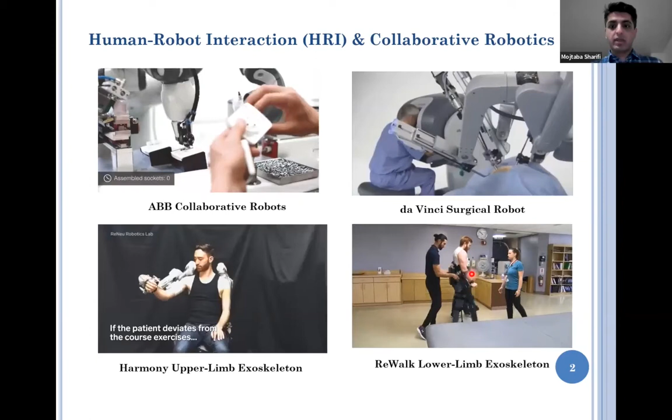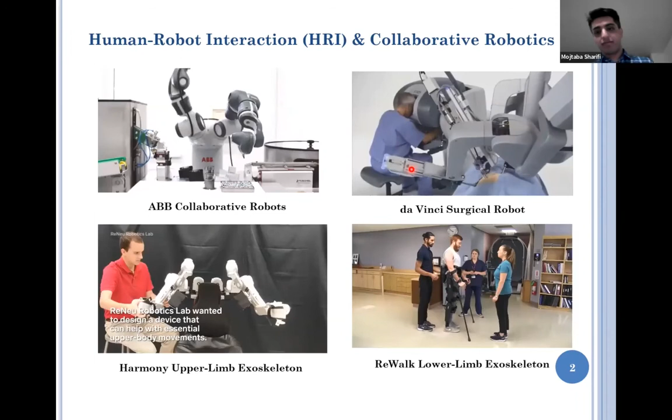Basically, in these systems, the human is the recipient of the physical assistance provided by the robot, or he or she is doing a collaborative task together with the robot. So we want to enhance the quality of life for the human, and we want to make those physical tasks simpler or easier using these autonomous systems.

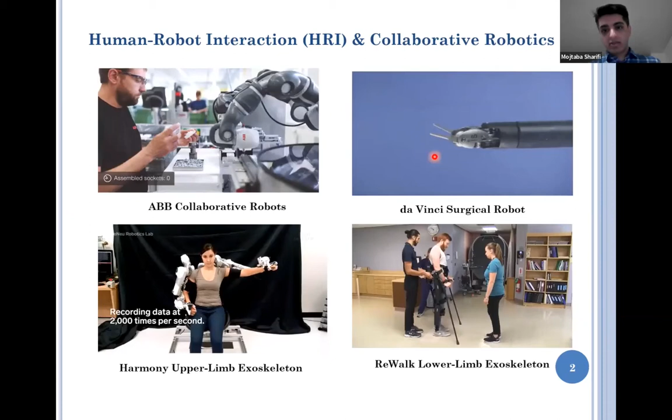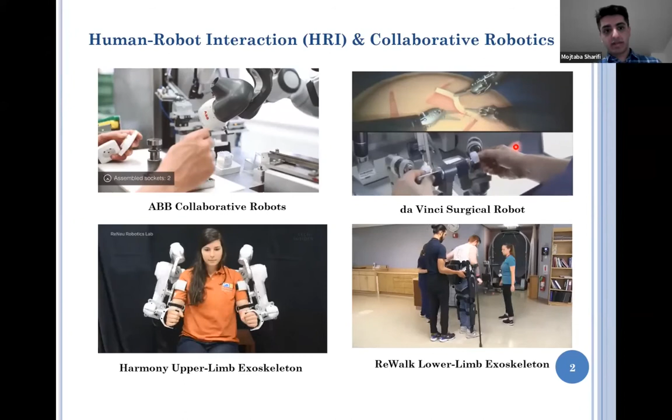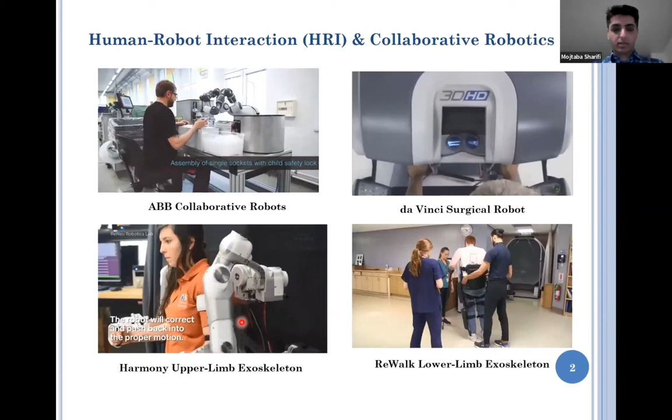So in these videos, you can see an operator that is doing a collaborative task with an industrial robot. And you can see this surgical robot that is doing a suturing task based on the motion of the surgeon's hand. And you can see upper limb and lower limb exoskeletons here. So that's the upper limb robot by Harmony Laboratory, a company in the US, and this is the robotic lower limb exoskeletons.

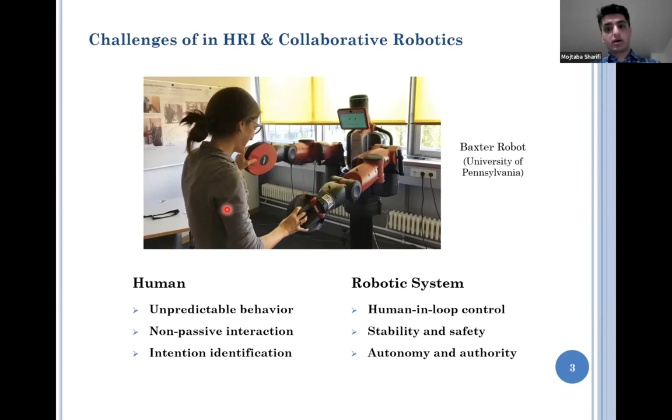At the same time, the existence of human in these HRI systems, human-robot interaction systems, can raise some concerns due to the unpredictable behavior of the human, having non-passive interaction between the robot and human, and also the requirement of identifying the intention of the human operator. So for the control of these robotic systems, we need to consider the human in the loop of the controller. This brings some technical challenges regarding robot stability and human safety, and also the shared autonomy or authority between the robot and human.

So in my research over the past 11 years, I have made an effort to resolve these challenges, and I had a general goal to balance major HRI concerns. The first concern is the human authority and the robot autonomy. The second concern, or characterization - we can look at it from different points of view - but the second one is the system stability and human safety. And the third one is the task performance. So I try to offer trade-offs between these three concerns from different points of view.

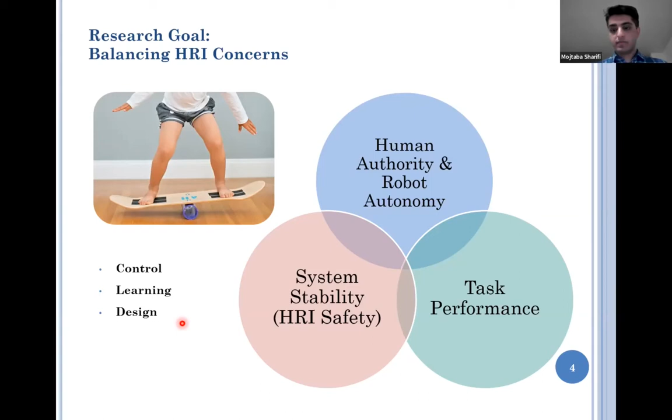In the field of control, learning, and design - most of my research was on control. Recently I moved to learning, and I have some projects on the design of these robotic systems. So in this presentation, I will just talk about my second research area, which is on interaction learning and autonomy for assistive exoskeletons, that I started from the end of my PhD and also in my postdoc.

As you may know, exoskeletons are being used in two applications. The first one is for empowerment of able-bodied people and workers in their hazardous or heavy manual tasks, so basically we want to prevent their injuries. The second application of these exoskeletons would be for assistance and rehabilitation of individuals with disabilities, basically after having an injury or having a disability.

However, doing research in this area is challenging due to having a continuum of interaction between human and robots, and the lack of measurement for interaction forces or torques compared to other HRI systems where we have one or two points of interaction. So instead of that, we have a continuum of interaction, and that makes it hard to measure the interaction forces. So now the question is, what are the basic requirements for controlling these systems?

Well, the first one would be estimating the user effort and identifying their interaction, which is hard, as I said, to measure. After that, the second challenge would be path planning for these exoskeletons, how we can do motion planning and make it personalized for each user.

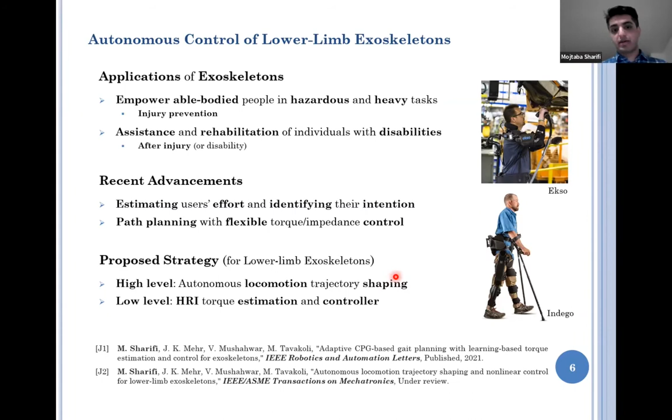So to design the control strategy, we can formulate the nonlinear dynamics of the human exoskeleton system in this form. The first term represents the inertia. The second term represents the Coriolis, centrifugal, and damping elements of the robot dynamics—I would say robot and human both together. And the third term is the gravity vector. On the right side, we have torque of the actuators of the exoskeleton, and also the torque of the human wearer, like the torque that the human can generate by activating his muscles, by contracting muscles.

So we have these dynamics, and this dynamic has some properties, such as having a positive definite inertia matrix, which has a lower bound and an upper bound. Also, it has linear parametrization characteristics, such that we can basically put all of the variables on the left side in a matrix and all of the parameters in a vector. So we call it linear parametrization.

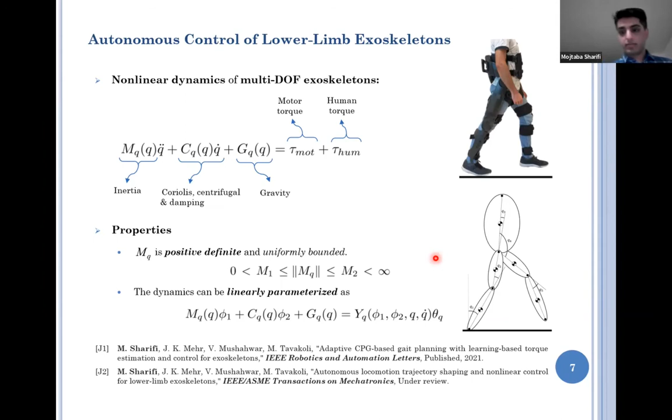So in our strategy, we have two components to generate the personalized gait trajectories to be tracked by a position controller. The first component is central pattern generator, which we call CPG, and we made that CPG adaptable to human-robot interaction, as I said.

But generally, CPGs are a set of connected networks that can produce coordinated or synchronized patterns for rhythmic activity such as walking. So they are good mathematical tools to generate those synchronized and rhythmic motions for different joints of the human body during walking. The second component in our control strategy is an adaptive disturbance observer for online estimation of the human-robot interaction torque.

So, Mojtaba, may I ask a question? Go ahead. You write on the first point that it's based on non-oscillatory inputs. What is the relevance of this? And also for walking, wouldn't most of it be considered oscillatory, or what is the motivation?

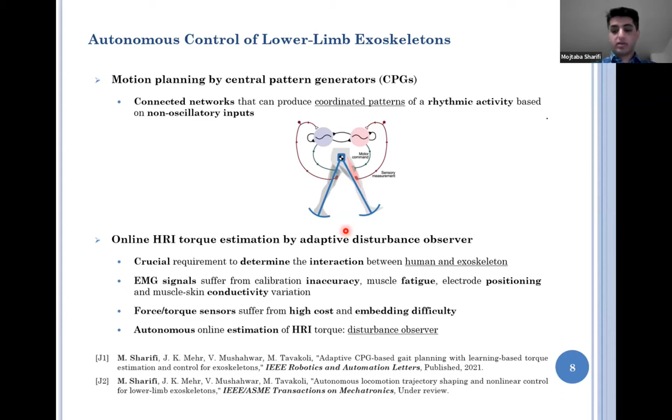So here we can see a schematic diagram of this two-level control strategy. We have some Fourier series to mathematically formulate the primary experimental data and generate a time continuous trajectory as the initial trajectory of motion. This trajectory is reshaped or updated by the adaptive CPGs in terms of the estimated human torque. And the output of this CPG will be tracked by this nonlinear controller and implemented on the exoskeleton.

So at the same time, as I said, we have an adaptive disturbance observer that has feedback from the exoskeleton that can estimate the human interaction torque. And based on that, we can estimate the human energy, like the energy that is transferred between the exoskeleton and the human. And basically this energy would change the generated trajectory by the CPG.

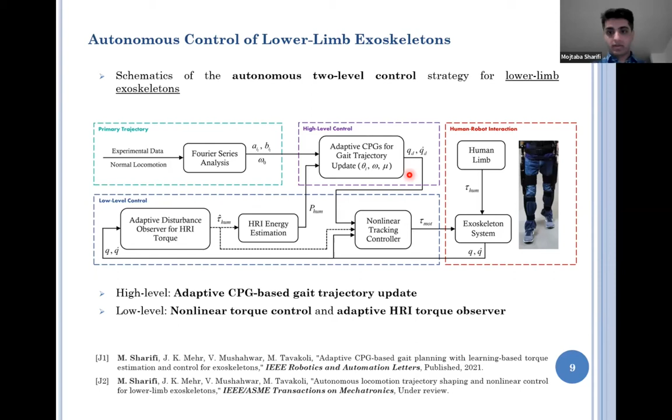So when we estimate the human-robot interaction torque, we would pass it first through a dead zone function to take care of more meaningful torques with enough large magnitudes. Basically, if the torque is higher than a positive or lower than a negative threshold, then we would consider it as a meaningful torque between the human and robot.

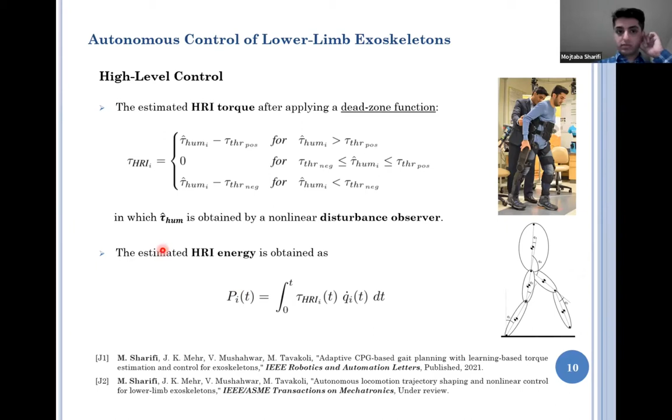And then we use this estimated torque in this formula to estimate the energy. So we have torque multiplied by velocity, and that would be a kind of magnitude for the power that is transferred between the human and exoskeleton. And then the time integral of that would be the energy that is transferred between them.

So here is the mathematical formulation of CPGs that I was talking about. And this is somehow our high-level controller. So in this dynamics, we can generate and change the frequency of the motion, the amplitude of the motion, and the phase of the motion for each joint. And as you can see, these are second-order differential equations.

And we added these terms, which is the summation of all of the energy components transferred by all of the joints, including hip, knee, and ankle for different exoskeletons. And then by transferring energy, we can change the frequency of the motion and amplitude for the whole motion of all of the joints.

And also, by having this frequency and amplitude, we would substitute these values into the Fourier series that we have and generate time continuous and rhythmic motion by this one. Also, this frequency would go to the dynamics of the phase for each joint, and the difference of the energy between adjacent joints would also generate a phase lead or phase lag between two joints that are close to each other.

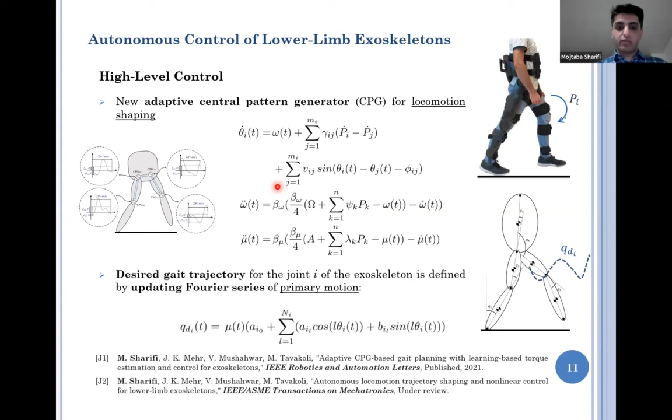But at the end, we would get the estimation of the human torque, and we will put it here to close the loop of the controller with the interaction between the human and exoskeleton. At the same time, this interaction will be used here in this energy that we are using for CPG. So the human interaction torque estimation will be used in both CPG and also the controller at the low level.

So here is the Lyapunov function that we use in terms of tracking error and also the estimation error for the human torque. And at the end, we proved that the error of tracking and the error of estimation will converge to a compact zone, to a bounded region. And this bounded zone would be in terms of different errors that we have on the dynamics of the human exoskeletons. But at the end, we would prove bounded stability, or bounded convergence, I would say.

So now I'm going to show the experimental results. So we fit an 8-term Fourier series to formulate a typical trajectory of walking, and you can see the coefficients of these Fourier series here in this table. I'm going to present the result for 2 wearers. The first wearer applied torques at the beginning of the walking over the first 4 steps.

As you can see, he is changing the amplitude. And as you can see, the rhythm of motion, the frequency of walking, is also changed. At the beginning, it was slower. You can see the time period is bigger. And from this point, you can see the time period is smaller. And he could change the gait amplitude by 15% in this experiment based on the dynamics of the CPG that I presented.

And here you can see the performance of the tracking controllers. You can see that the error of tracking for right knee and hip converges to a bounded region or compact zone, which is smaller than 2 degrees. And this is acceptable to have a kind of tracking for the trajectory of walking.

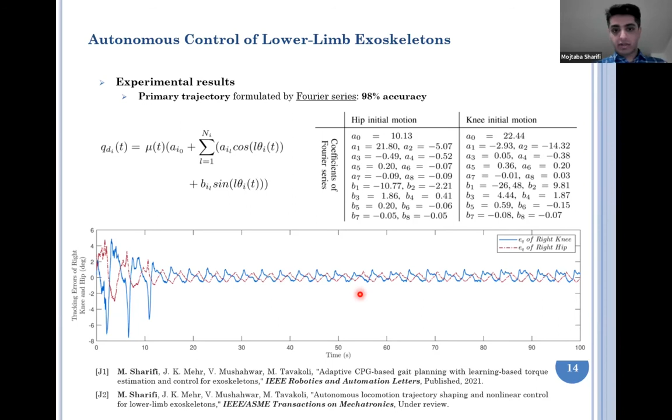But here you can see the result for the second wearer. The second wearer applied major torques over the first 6 steps to adjust the speed and the amplitude of the motion. And the maximum torque was less than 3.75 Newton meters. And as you can see, he transferred most of the energy through the left hip, as you can see here. The dashed green one is the left hip. And after that, using the right hip. So he used both left and right hips to accelerate the motion.

And as you can see, the frequency got changed over 6 steps. And after that, he didn't apply major torque to change the speed because he was fine with that kind of synchronization. So the speed and the amplitude didn't change after 20 seconds and after 6 steps.

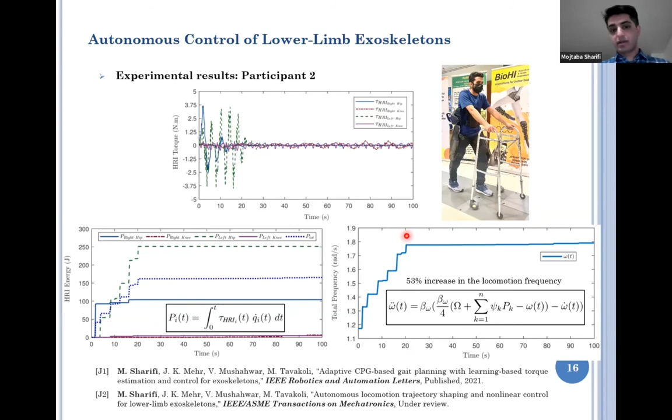So to understand the synchronization, we also plotted the right and left hip trajectories with respect to each other. The motion is rhythmic, so we are repeating the same trajectory over the steps. But as you can see, for the first wearer, we have an average phase lead of 13 degrees for the right hip motion compared to the left hip. But for the second wearer, we have a phase lag of around 4.8 degrees for the right hip compared to the left hip.

And as you can see, we started from the dashed red trajectory and moved to the black one. So the deviation of the trajectory for the first wearer and the second wearer is completely different. And to understand the phase lead, you just have to consider one point here on the red trajectory and get the corresponding point on the final black trajectory. And then if you get the point again on the red one, you have a kind of phase lead for the right hip.

But for this one, if you get this point on the red trajectory and get the corresponding point here, and then get the corresponding point on the right hip, you can see we have a lag in this motion, because the motion is toward up, and then we went toward down on the black one. So compared to the initial trajectory, we have a phase lag for the right hip, and a phase lead for the right hip for the first wearer.

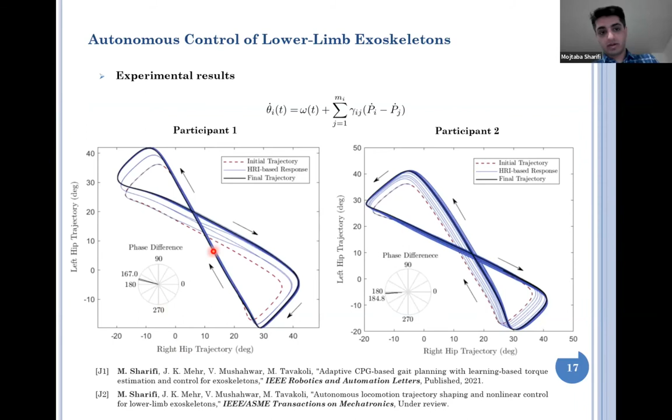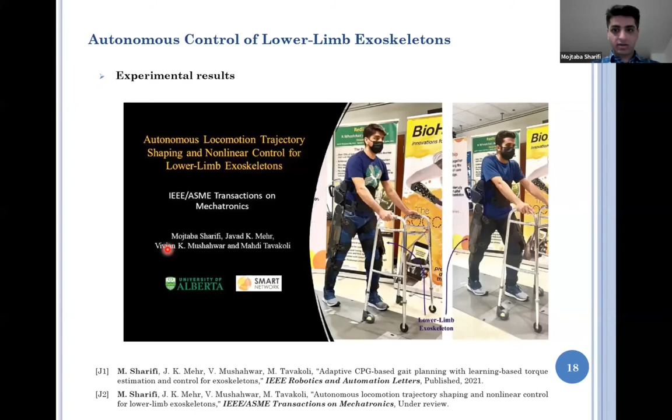Here is the video of those experiments for both operators and wearers.

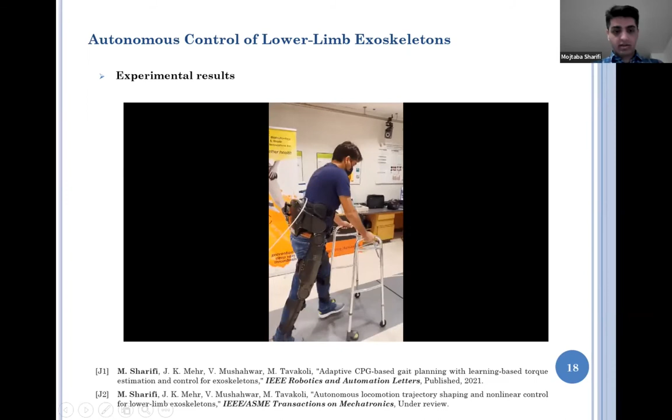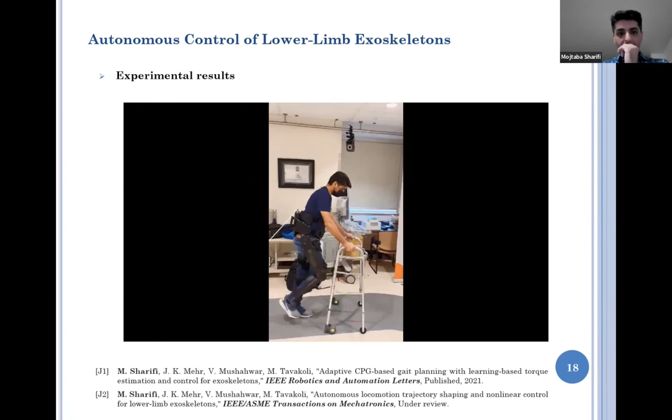So that's a long video. So we had it for more than 100 seconds for each wearer. That's for the first wearer.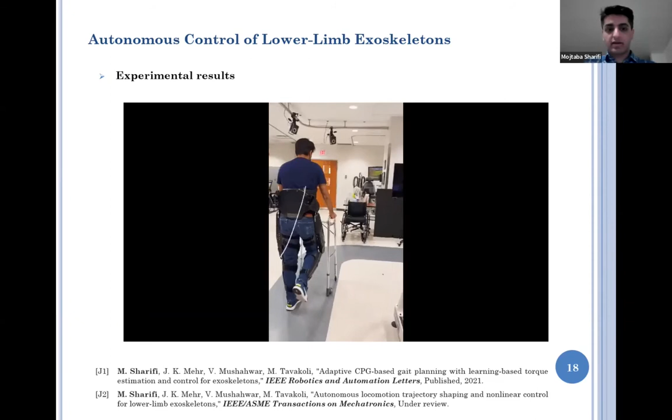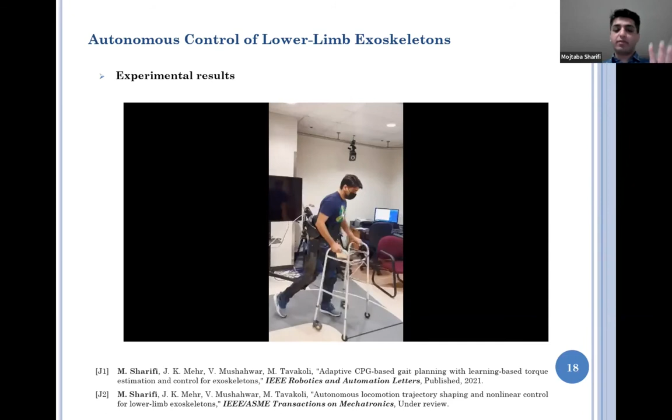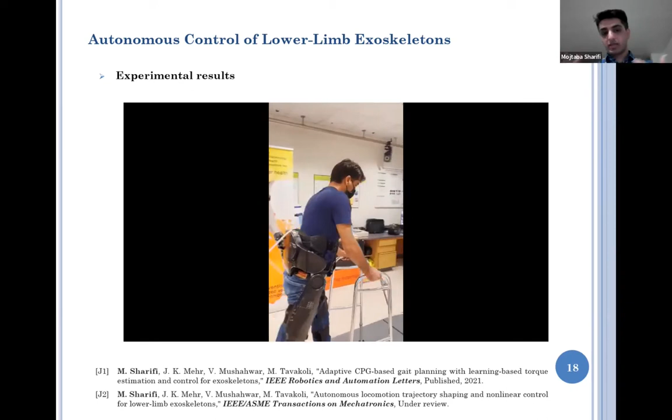And that's personalized, which means that the user can change the amplitude of the motion. As the height of the user is bigger, or when they are taller, they can increase that amplitude to be suitable for themselves. Even though these exoskeletons in the market, they have a predefined trajectory. So we cannot change the synchronization between the joints, or the amplitude that much.

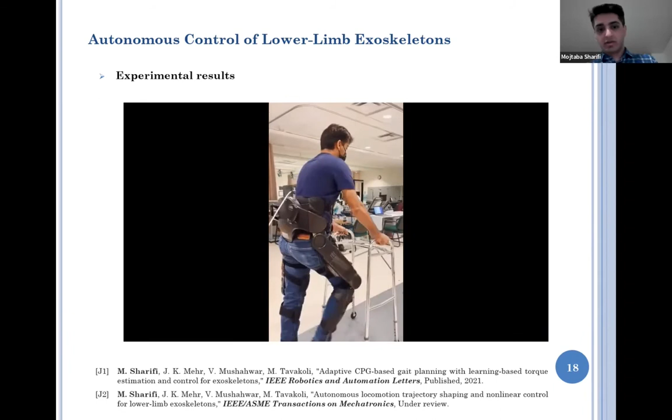There are specific levels that you can choose, but using this intelligent controller, you are able to change it over the first couple of steps, and then you can walk with the same pattern for the rest of your walking. So that's for the first layer, and there is another part for the second layer.

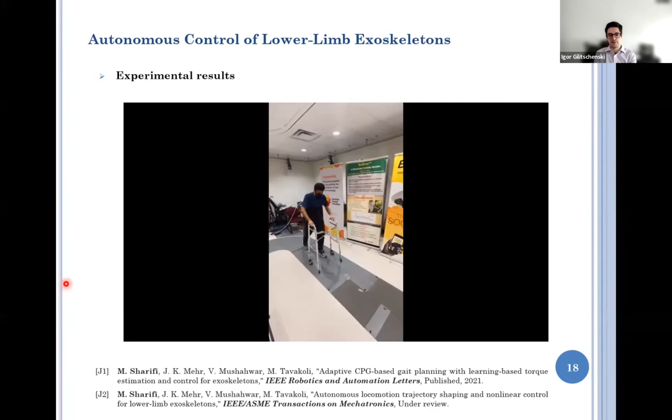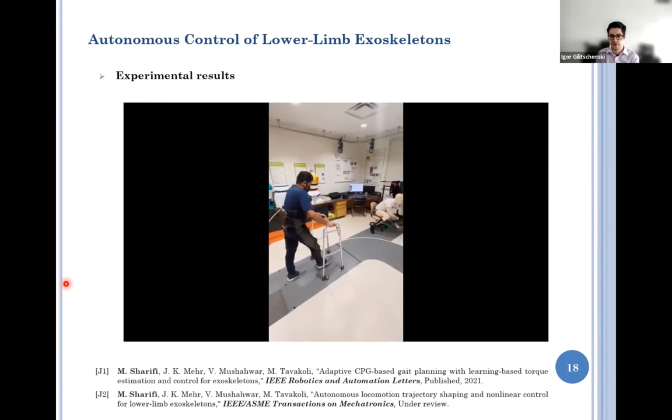You're showing this, maybe a question. You were speaking at the end of walking in the same pattern. How good or how fast do they usually adapt to pattern changes? It depends on the parameters that you change. You basically adjusted in the CPG dynamics. Mm-hmm. So we made it very fast. I would come back to the results.

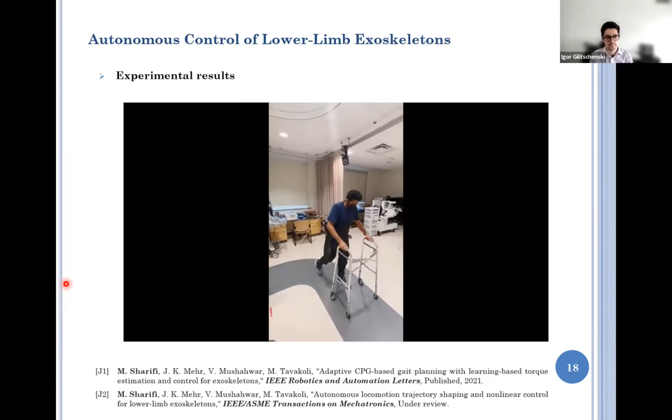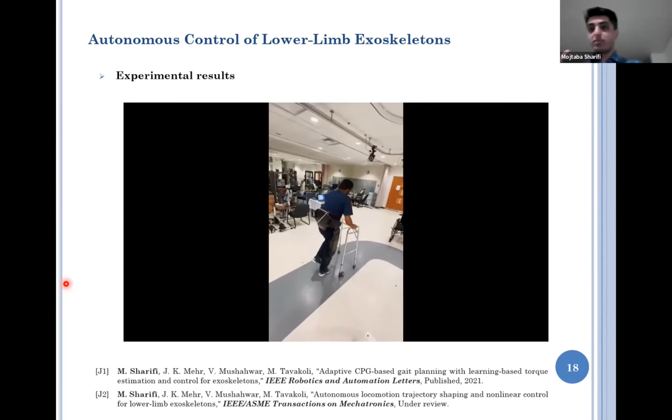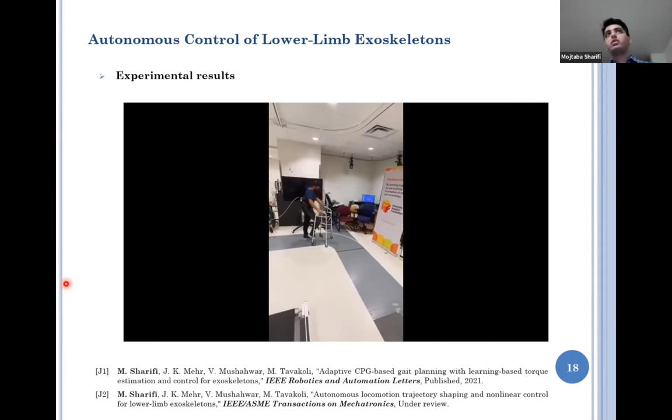Like the person applied a torque on just one step. And during one step, we have the complete response. The response of CPG is faster than one step. So in that case, if you want to accelerate, you can do that just in one step. And then if you want to do that over a couple of steps, you can do that step by step to get your desired trajectory.

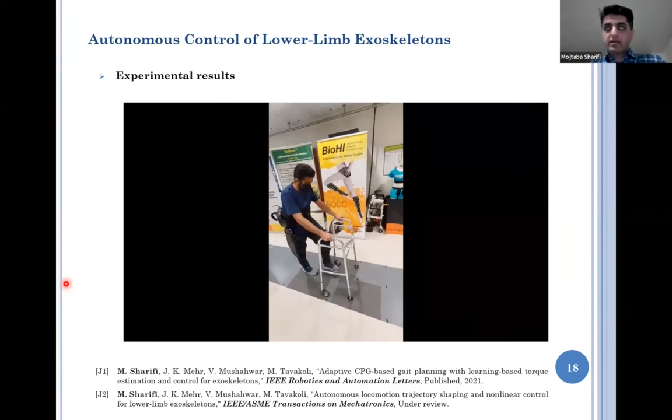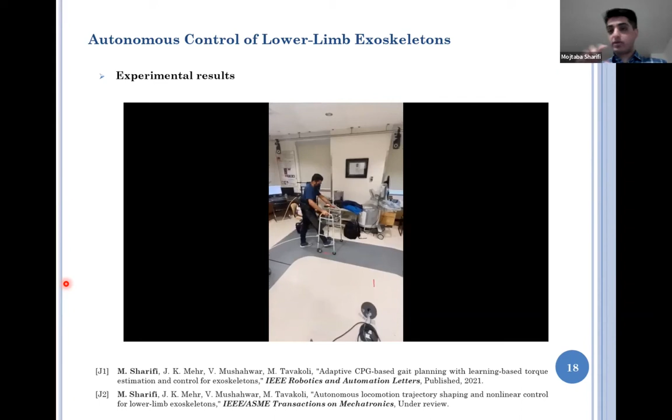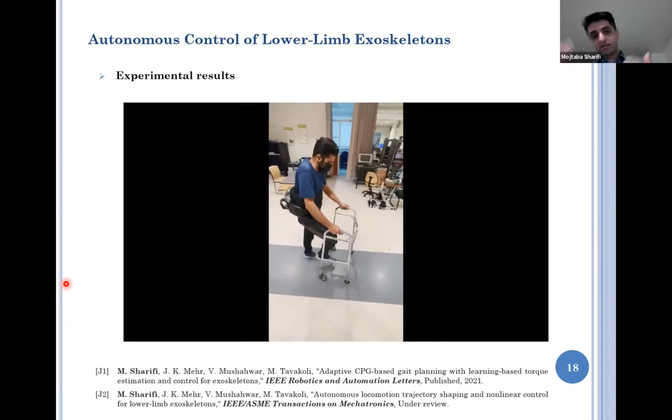So the response of CPG is pretty fast. And that's based on the parameters that you select for the CPG dynamics. So that was a kind of trial and error to get the best parameters for that dynamics. And we did that just by doing different experiments. When you see that it's not fast enough, then you need to work with that, make it better. When sometimes there is an overshoot, again, you need to make the parameter selection better.

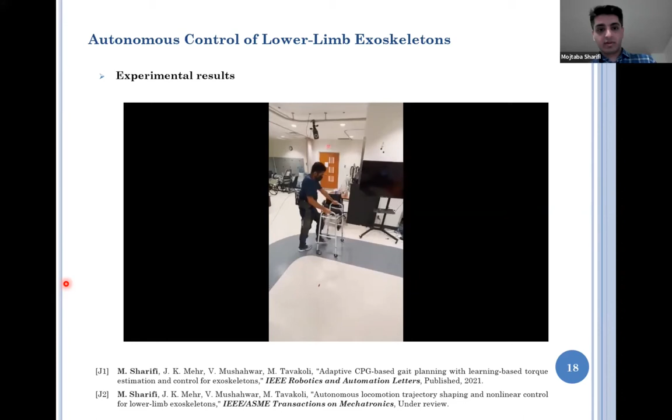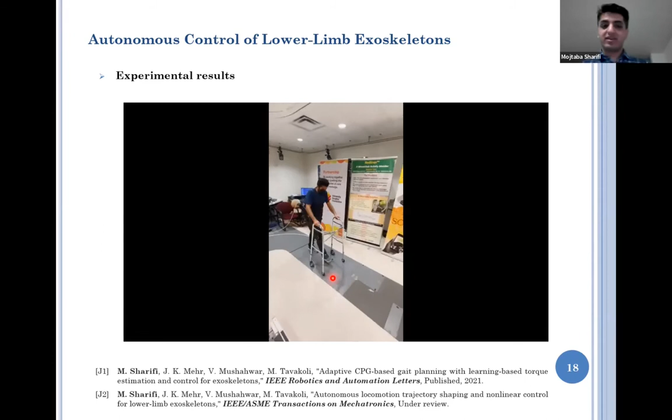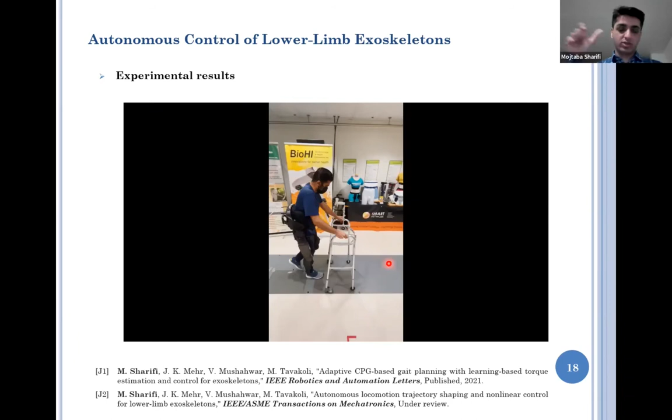But you know, typically it's hard to walk with these exoskeletons. You wouldn't walk like a normal locomotion. So it's really hard to make it comfortable and natural for each user. But we try to do that using our controller. And we have a research-based package for this exoskeleton. So we are able to change everything for this exoskeleton, because this is mostly for clinical settings, and they are not able to change anything, because you can just use the mobile app for that.

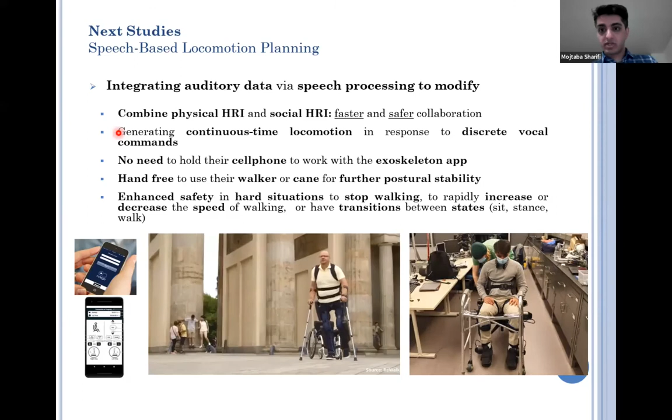So that was the end of this presentation, but I want to talk about my other projects and other studies that we have in this area. So in addition to this research, we also started a new collaboration with researchers in the field of natural language processing, NLP, to integrate auditory data via speech processing in locomotion planning.

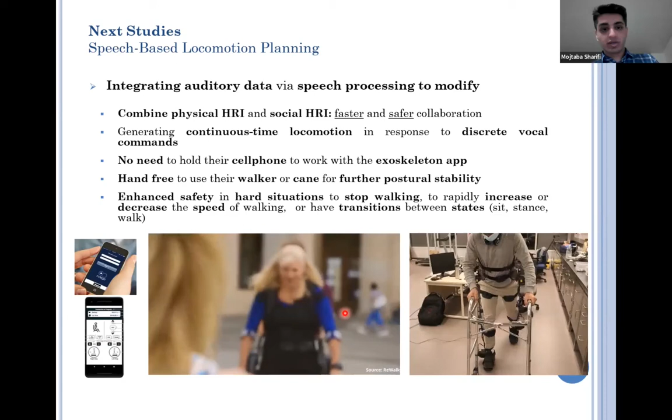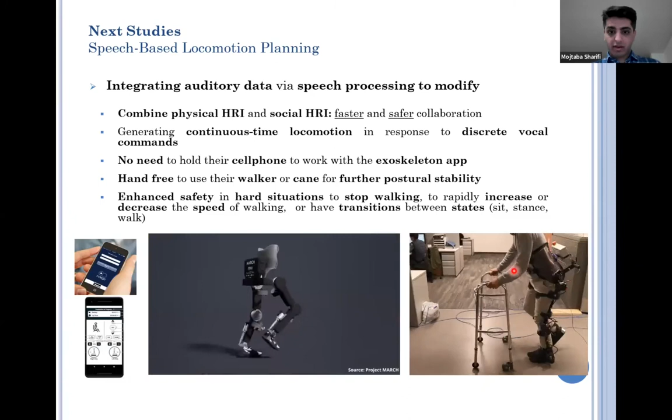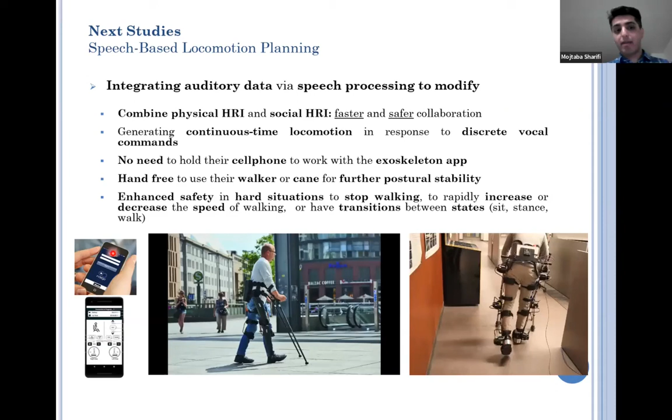So we could combine physical HRI with social HRI. This is the last experiment that I did in Canada before leaving, and I and other students wore the exoskeletons, and we are talking to the exoskeleton using the wireless microphone that we have. So we can command the exoskeleton based on our vocal data, instead of having the app of these exoskeletons and using their buttons, which is really hard because the person needs to have a kind of support by a walker or a cane.

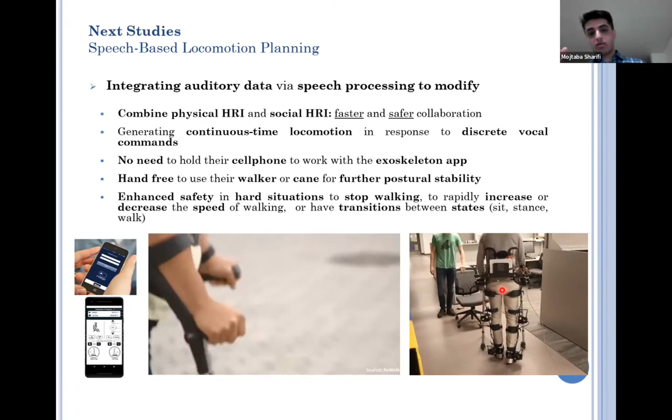And at the same time, it's hard to hold that mobile app. So we use speech processing here to get the vocal data in a noisy environment and recognize the user among other people in the environment.

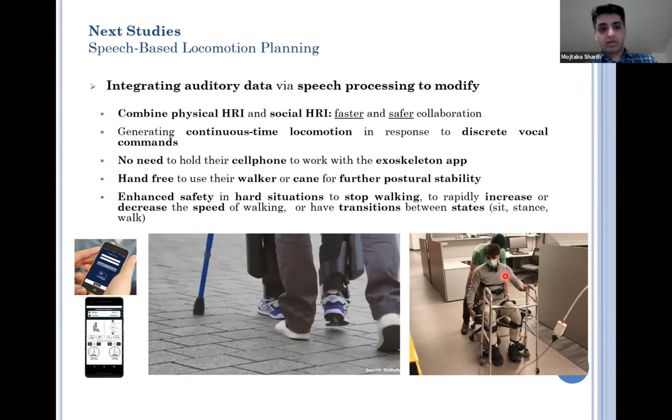So also my third research focus is on the development of soft and wearable robotic systems. So in this project, we basically designed and fabricated light and soft exoskeletons. So we have soft actuators, as you can see, artificial muscles, to actuate the shoulder and elbow joints. And that was a result of a proposal that I wrote for my postdoctoral research. And we developed 3 generations of this exoskeleton, and this is the first generation.

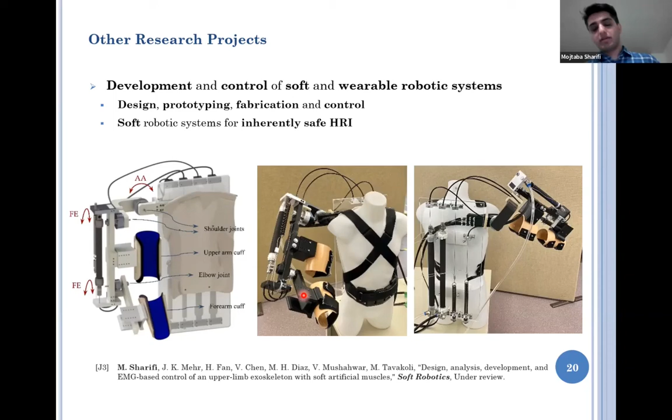But we made it lighter and more effective in the next project. As you can see here, this is the first version. This is the second version of the exoskeleton. But we also integrated biological signals such as EMG. We can see we are using EMG signals for the shoulder and elbow muscles. And based on that, we are commanding the exoskeleton to assist the person, for example, here for weight handling.

And here I'm not attaching the exoskeleton to myself, to show how my muscle contraction can command this exoskeleton to move. So we have EMG electrodes on the shoulder muscles for abduction, adduction, and flexion extension, and also for elbow flexion extension on the biceps muscle.

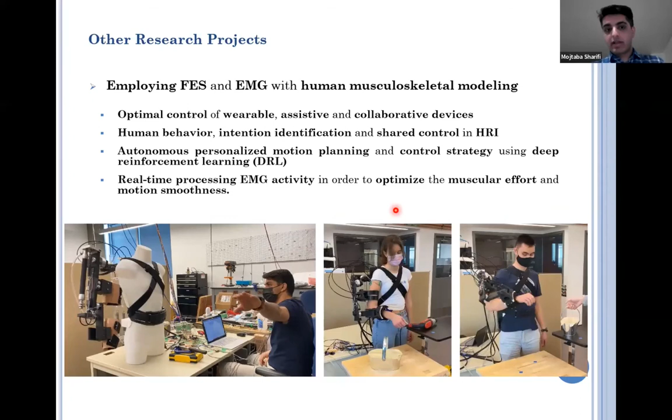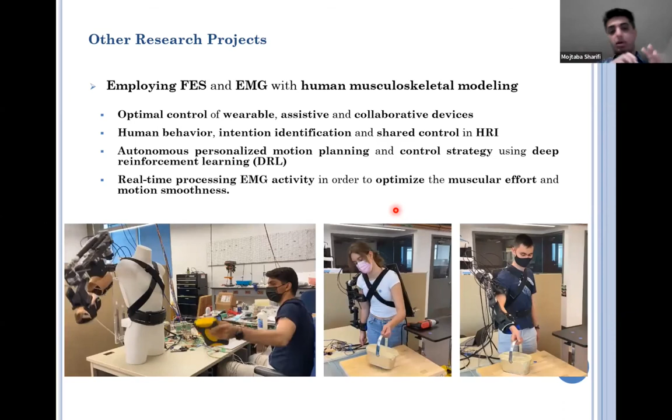That's another contribution we can have, and that would be kind of a combination between computational AI and analytical AI. The controller is still analytical—we have a classic controller—but the parameters of that controller are selected by machine learning algorithms.